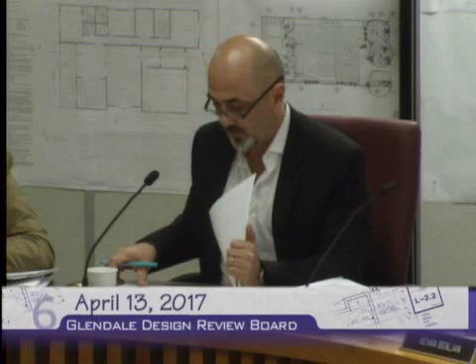So, thank you. Now going down the agenda, is the applicant for Deermont in? Yes. Okay, perfect. So we won't take the agenda out of order, we'll continue on. Well, the applicant is here, but not the architect. The architect's not here yet.

What do we do? We're going to have some design questions. I think we should wait until the architect gets here. It would be the applicant's call, so it's up to them. He's in the parking lot. Okay, then why don't we just start presenting the case? Let's go ahead and do that, and then we can see where we are. Present slowly. Too much. Are we ready then, or are you reading the description?

This is case number PDR 1702018, located at 1819 Deermont Road. The applicant is requesting to demolish an existing 3,233 square foot single-story house with an attached two-car garage, built in 1962, and to construct a new 4,802 square foot two-story house with a three-car subterranean garage on an 18,022 square foot hillside lot, zoned R1R, restricted residential zone, in the floor area ratio 2 district.

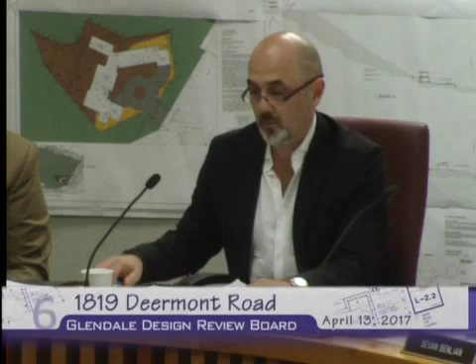So is the architect here? Okay, then what we're going to do is we're going to continue this, and we will temporarily put a hold on the project and move on to the next project. And then if the architect is here, we will come back to this, if that's okay with everyone else.

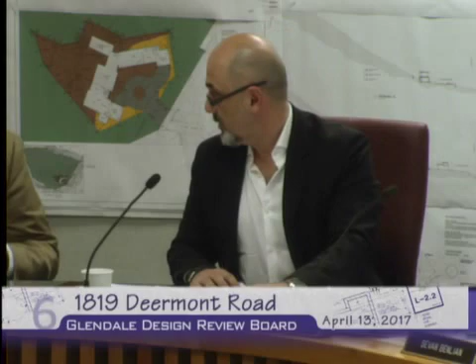We won't have staff repeat this again, but we haven't opened the public hearing, so we can go ahead and do that. So let's move on to the next project for now, Idlewood, and then we'll come back to this.

You gotta do something.

So this next project before you is located at 1443 Idlewood Road, case number PDR 1704989.

The project is the demolition of the existing one-story house, which was 1,754 square feet in size, and the new house will be 2,348 square feet. It will remain one story and will have an attached 504 square foot two-car garage, on a lot that is 7,858 square feet. The work includes demolition of the house and construction of a new home. In terms of materials, it will be an off-white color, similar color for the windows and doors, mission tile for the roof, stucco finish, and new landscaping with a pool.

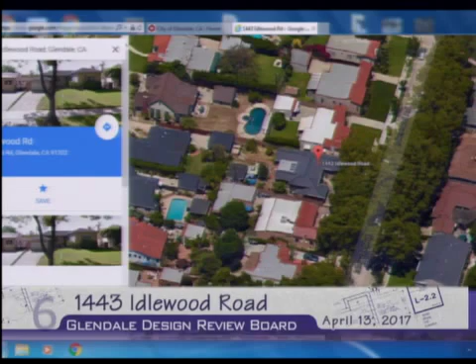We did receive several letters, which have been forwarded to you, from neighbors in the area. Based on my precursory review of the letters, the issues mainly relate to the design and mass and scale as perceived from the front. For example, the two-door style for the garage as opposed to a single door, and the front entry tower being incompatible with some of the other homes, or more of the low-scale entries in the neighborhood. So if you haven't done so already, I encourage you to please read those letters.

And the plans are on the panel behind you. So would you like me to go over any of the comments or staff bullet points in the staff report? If not, I would conclude at this point my presentation.

Just one clarification, Mr. Chairman. The home that was the 1938 home, there was no historic issues with that home, correct? No, we actually had Jay Platt review the home, and it was determined that it's not eligible for state, local, or national register or of any historic significance.

And one other point of clarification. One of the emails I read seemed to indicate that there was construction or demolition done before any permits were issued on this property. Well, that is correct, because the plans were in the plan check process without having received the final building permit approval, and during that time is when one would assume that took place. Okay, yes. Thank you for the clarification.

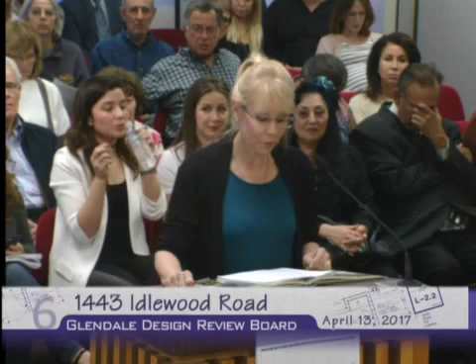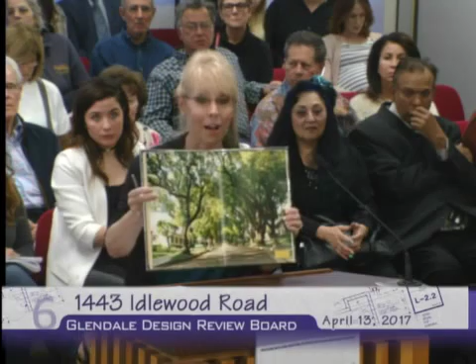We are very proud of the 1400 block of Idlewood Road, as our block was featured as the centerfold with our camphor tree-lined streets in the book Glendale, Jewel City of the Verdugos, published by the Glendale Chamber of Commerce in 1995. The centerfold is the 1400 block of Idlewood Road, published in 1995, as I said.

And I believe each of the design review board members received emails of the photos from this book, and were also emailed a black and white photo taken in the 1970s by a family member. Our family has several photos from 50-plus years ago that show that little has changed on the block, and those pictures look like they could have been taken today.

Sadly, because of the happenings at 1443 and the blatant disregard for the architectural integrity of the neighborhood, that isn't the case anymore on that section of the block, and it breaks our hearts.

Getting back to the proposed design, here are our three main concerns. Double garage doors: there are only three houses, which include 1443 Idlewood Road, that have garages located in the front of the house on our block, and none of them have double garage doors. Front door of the house: we feel the double front door does not fit the look and style of the neighborhood and looks out of place.

And finally, the roof - we feel the roof looks way too high compared to the other houses on the street and in the area.

Unfortunately, we must also point out, as you well know, that we're very distressed that the construction, the tearing down of the structure, apparently started to take place without any final approved building design in place. We, along with our neighbors, had to endure looking at a fenced-in construction area for the last 9 to 10 months in which no construction work was allowed to take place, and it has added to a messy and unkept look to our block.

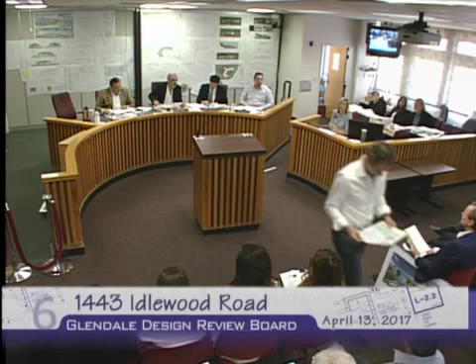Yeah, thank you. Mm-hmm, thank you. Is it Les Halpert? You can answer the question if you can state your name and address. Les Halpern, and I live at 1450 Idlewood Road, which is a couple doors to the north and diagonally across the street from the property in question. Good evening, Board. Glad to be here.

First of all, Mr. Conkin, I'll answer your question. There were multiple trees along the street. A number of them have been removed for disease and other issues. There are two in front of the subject property. The one to the north was removed due to disease about a week ago. The one to the south was trimmed and was stated to have been in good continuing condition as long as it's taken care of. That is the one that would need to be removed to accommodate the driveway in question.

So, like's been said before, I think we would strongly fight the need to remove that tree. We do value our trees. My other comments have pretty much been covered before. There's two additional things that I would like to say.

The homes on the street are all unique. There's a number of unique features to each one. Our house at 1450 and the house on the same side of the street just to the south of us were both done by the same architect. When we talk about door entryways, this particular architect was noted for designing entryways that did not go directly into an entry - everything's at an angle. If you look at our house at 1450, if you were there this morning, you'll see that the walkway comes up, the door is at an angle, and in fact, when you walk into the house, you're not walking directly into a hallway, an office area, or a living room. It just kind of goes into almost like a little foyer, and then it angles off.

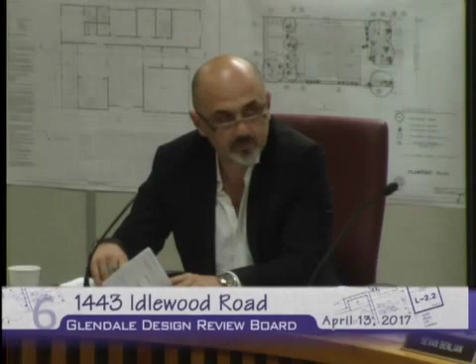Mr. Chair, also on that note, I'd like to clarify so the audience and the neighbors know as well. They did come in to the city in good faith to apply for a permit. They were in the plan check process, as I stated earlier. They did receive a DRB exemption for that scope of work. We've heard now what happened out in the field, when it was discovered by whomever, whether the building inspector or neighbors, and that was brought to our attention. The applicant did once again come back in good faith to the design review board, applied for submittal for a design review board, and paid the double fees, which is not cheap. I want to say it's close to $15,000 that this applicant has paid. So all, again, in good faith to move this project forward.

Okay, well, I'm glad that you cleared that up. Thank you. Do you have anything else to add? You need to speak if you do, and you have 2 minutes to speak. And if the owner can fill out the form.

Actually, we pulled a permit for interior remodeling, and after that accident we tried to keep the same design and everything. The previous planner should know, the city knows how long it takes. We did all the calculation for demolishing and everything, and tried to keep the project going, but it was accidentally done more than it's allowed. That's why it came such a long way.

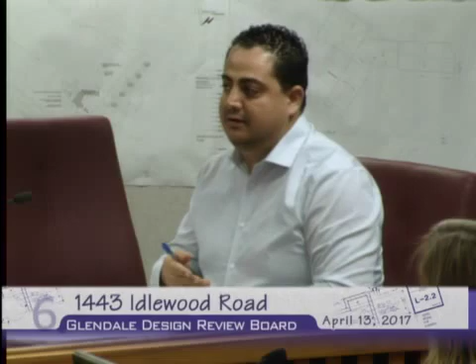When I was reviewing this project, it seemed to me there were a few things going right and a few things that weren't going right for the project. The things going right: you guys are following the footprint of the previous property. As mentioned by the president of the association, you didn't propose a two-story, which is a good thing, and you're proposing a moderate size, not a big house, so that's also good.

Now, the things that weren't going too good for me, I think they're all addressed by staff, and staff did a phenomenal job addressing these issues. As I heard from the people opposing the project, they have the same issues, other than the permit issues, which the owner has clarified, so that's not a problem.

Staff put conditions to fix most of these issues, which is the door in the front, the entry, the roof, to simplify the roof and try lowering the height. The only thing staff didn't touch on, I think, is the windows, and staff I think recommended just changing the color. I would say just change the material and upgrade the windows to something nicer than vinyl.

And the only thing I think staff didn't talk about is maybe the garage door, which I agree with the comments the residents brought up, maybe going to a one garage door. That's going to help a little bit with that look. Other than that, I think if you follow the conditions, I can support the project.

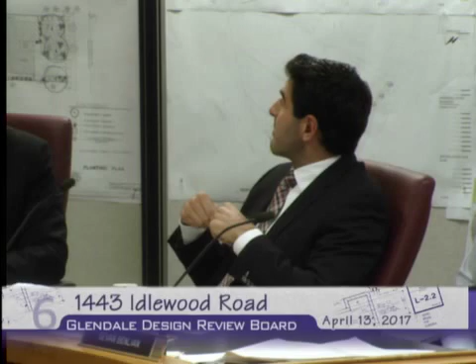I think reworking some of the materials and applying more detail to the rafter tails will allow us to keep what's presented here, but make it a lot more compatible.

So those would be my thoughts, and we could discuss it some more after you guys speak as well. Okay, thank you.

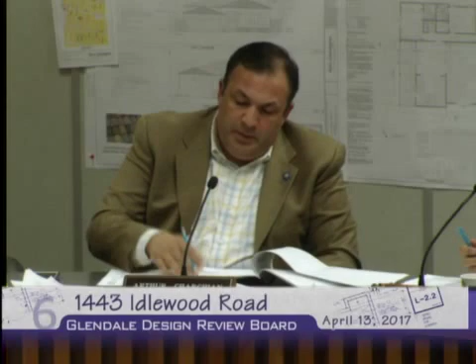Thank you, Mr. Chair. So I do agree with some of the staff comments, particularly the door. I think the door is too ornate and is in a style that is not conforming to the neighborhood. The iron doors just don't fit in this type of neighborhood.

I think that the overall mass of this home is okay, but I have issues with the height. I agree with one of the speakers that the S-type tile is not a very good fit, especially the Capistrano palette that they're suggesting. It seems to give it that track home kind of feel, and I don't think the homeowners are going for that, and I don't think the neighborhood deserves that kind of a look.

I thought the attempt by staff, I'm assuming this might have been a staff condition, to split the garage into two by having that center piece was trying to break up the mass, and I'm kind of confused because I heard a single garage door and agreement that a single garage door is the way to go. I am of the opinion that having that break in the middle kind of breaks it into two smaller garage doors and gives the appearance of an older kind of garage.

Also, from a functional perspective, because of the way the driveway is laid out, that second garage is really not going to be as accessible because you'd have to make a sharp right and then a left to enter because of the way that the cutout is. So primarily they're going to be using that one garage door if we leave it as two doors versus one. So that's kind of my thoughts on that piece.

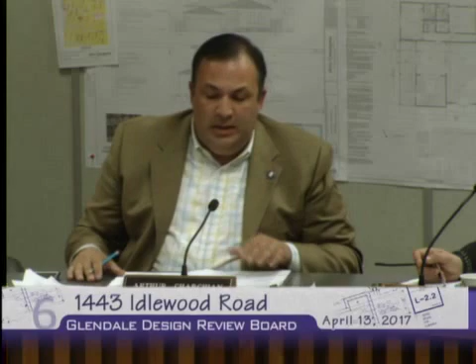Is it a Mediterranean house? Is it like a new Spanish-style house? I think if we are going to condition it, we should condition some characteristics along one design palette, and I see elements of both here. The bay windows, especially the one in front off the master bedroom, seems very out of place for the neighborhood, and so I would look for feedback on that as well.

Okay. I agree with the comments that the white vinyl, off-white vinyl, is just not appropriate and should not happen. Thank you.

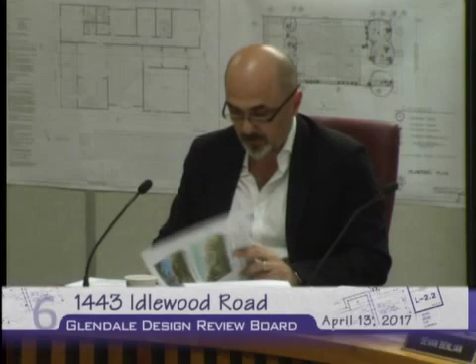So I agree. I think one of the big questions you just brought up is that we have to determine if this project, we need to look at the style that they have chosen, being that it is a Mediterranean style, and the majority of the homes that do have Spanish tile along that street are a Spanish revival. There are some ranch home styles. So the applicant has chosen to go in the direction of more of a Mediterranean style. I think one of the biggest issues I see is the amount of roof that we see from the street. The majority of the homes, almost all the homes that have exposed or hip roof seen at the street level, are all asphalt shingle.

So the Spanish tile roof that we have, majority of them, you see the rafter tails or they're gable. So I think by looking at this in the sense that right now the current home that was there has the hip roof, we need to—and they try to mimic that by replacing the lighter roof material with a heavier Spanish tile roof. So I think a study of a roof plan is definitely going to help.

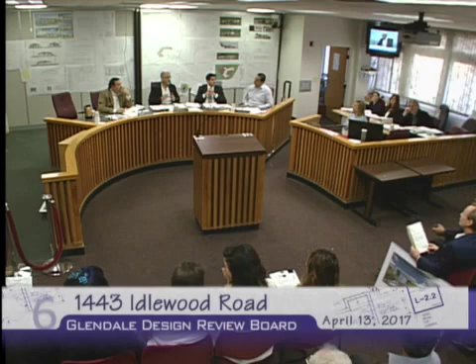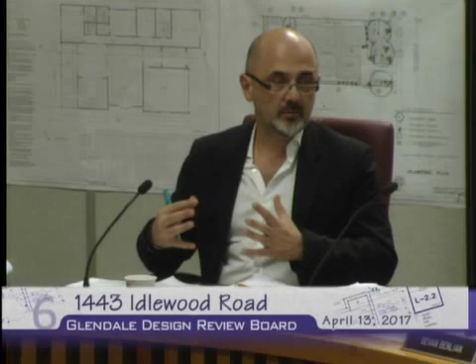One quick question. It seems like a fairly steep driveway when I was there, but I'm not sure, I didn't really see that steepness of the driveway, being that it's lowered. So I don't know, to be honest, if it's really an issue there or not. But with the gate and construction gate that were there, I wasn't able to see it, and there's no survey, so I don't know if it was high enough. But they have lowered the garage, so they do have the opportunity to make sure the slope of the driveway meets the minimum required slope.

So there's a lot of little things that need to be revised and be consistent within its own scale and style. By the end of the day, it's going to change. So the question is, do we see this back, or do we want to send it off?

Mr. Chair, on that note, the last item is whether we want to return it for redesign or we could actually condition many of the conditions we've been talking about. I think the latter is the way to go. Because there's no second story and we're not really talking about mass on a second story, it becomes a lot easier for us to prescribe a type of style that we think would be appropriate given what's being proposed, and all the other conditions we've talked about, and then have them work with staff. That would be my approach.

And I guess we could maybe see if everybody else is on the same page. If that's the case, we could spend our time and efforts on conditioning those conditions. And if not, then we'll just move on and spend our time on that motion.

I agree with this approach as well. The big question is, if we're going to completely redesign the project, I think we owe it to the neighbors and everybody else for them to see the end result rather than be surprised by what they come back with. So if it's going to drastically change that much from what's being proposed, versus somewhat of a small revision, creating a gable end roof at the garage or replacing some of the windows, that's what my concern is. So I guess I'm leaning more towards those kind of prescriptive conditions.

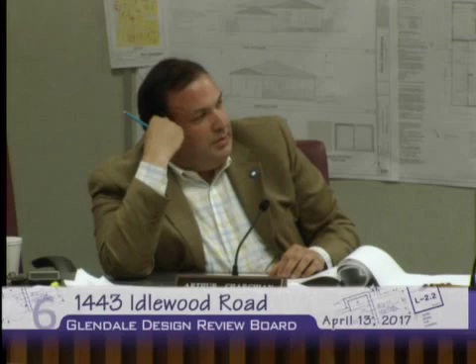Usually the flat garages that I've seen are separate, detached, in the back. They're not the dominant part of the front entry of the building. So I think... they are the garage. There are garage doors.

So short of us telling them to move the garage to the back, and we're not saying that, we're keeping the garage in the front. So I think we just need to make it part of the design of the building itself and make it work. Okay, fair enough. You know what I mean?

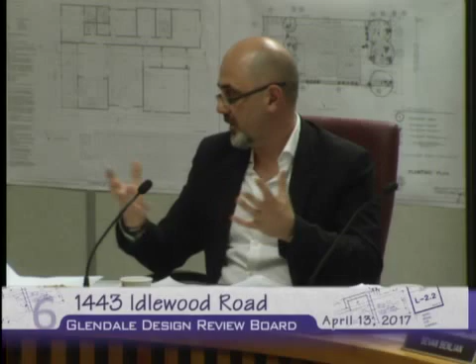So I think having the large gable roof that they're proposing gives a lot more mass than it needs to be. So I think a gable end or a hip roof with the exposed gable end would reduce the ridge. There's also the problem where that proposed hip roof at the garage hits the higher wall behind it.

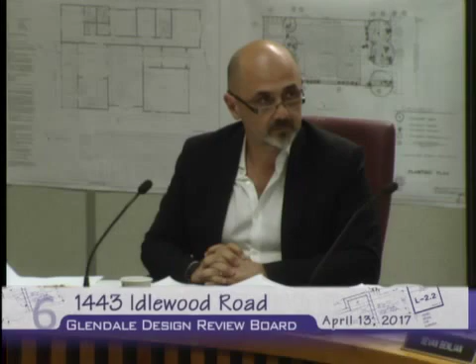It leaves kind of some awkward wall area. So we would hope through the roof redesign to make that interface a smoother transition.

So with all those conditions that were presented, is that something, Mr. Platt and staff, you're comfortable at least taking a shot and working with applicant? And if you're unable to get these resolved, it would come back to us anyways. Is that something you guys are comfortable doing?

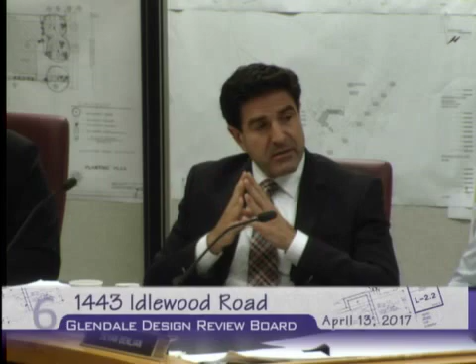If we could get a little more clarification from the board, personally the difference between Spanish and Mediterranean on some of these new houses is kind of a fine line. I'm not sure it matters that much as long as you're comfortable with the design, but if that is an issue for anyone, we should hear more about it.

I think really the biggest issue would be how the windows are treated, whether they're recessed or not, and the material around the windows. That's really where details and materials need to be consistent with the style being presented overall, so it all jives with the roof, the windows, and the entryways.

Whether it's a contemporary Mediterranean or a contemporary Spanish, it's a fine line anyway. We're not here to dictate style necessarily, but for the style, it's standard staff practice to have recessed windows with sills. On a Spanish style, we just have a simple stucco opening. If you wanted a bullnose, we could look for that specifically.

I've added a condition to make sure we get a vertical and horizontal section through a typical window opening so we can see its placement in the wall. I think that's up to the applicant, to choose a style and holistically treat the entire project with that style and make the materials match.

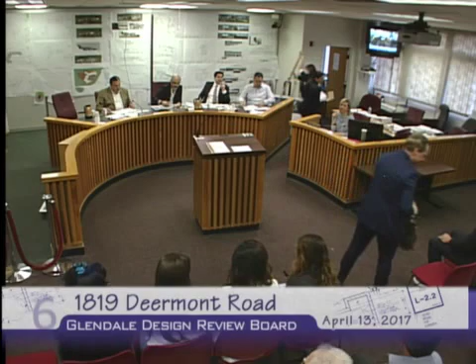Good evening, Design Review Board members and city staff. Horst Knoppenberger, I'm the architect working with George and Maria Najarian on Deermont. Apologize for being late this evening to you and to the neighbors who have been patiently waiting. Having said that, let me introduce the project.

George and Maria have a growing family of two young children. They recently purchased this house after George grew up in this neighborhood. The existing single-story house is roughly 2,600 square feet, built in 1961, and has really not been touched since. The pattern of development within the neighborhood has evolved into much larger homes. The existing site is 18,000 square feet, and we're proposing a house of 4,800 square feet of habitable floor area.

When I met with George and Maria, George, having grown up in the neighborhood, it was very important to him that the design of the house have a contextual approach. George drove me up and down the hills, and we looked at a wide array of architectural styles, modern houses, Mediterranean houses, all the things you were talking about this evening.

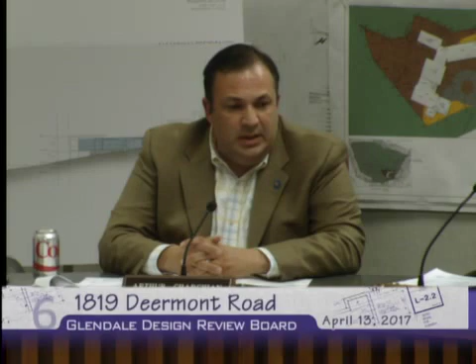So, you're coming in now with this project, and I will say, and this is a little earlier in the process to say this, but it's a good design. But we need to have these calculations in order to understand exactly the impact on the soil, on the hillside, on the amount of earth that's being moved, on the impact to the neighborhood from that earth movement. So I feel very uncomfortable moving forward with this huge gap in information.

I'm sorry to say that, but it's critical on a hillside development. If you had told me that you were building on grade or a couple of feet, we could figure that calculation out. But you're talking about 16-foot cuts. I was at the site today. I stood there and I looked and how is there no earth movement? Which is what the staff report said, and it turns out that that's an error.

Thank you for those comments. There are certainly things we should consider. One thing I would say is we went through a very lengthy process, working closely with planners here at the city. We had 3 meetings, and it was very helpful—they helped us make informed decisions about the project. I read the Hillside Design Guidelines, and several things are encouraged in them, like side-loaded garages. So it's a bit of a give and take. On one hand, what we're getting in terms of pedestrian experience is we're not getting a garage on the front elevation. Unfortunately, or maybe paradoxically, on this particular site, to do a side-loaded garage, there's going to be excavation.

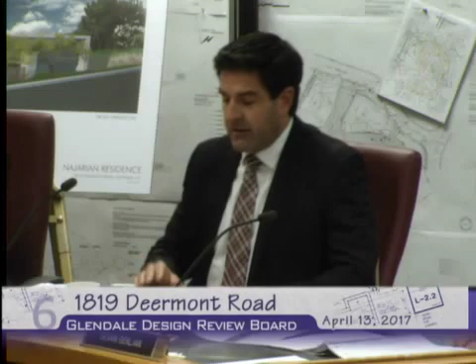I have a question. Just for clarity, there's an existing pad that exists, with a retaining wall at the end. And somewhere in that area, you're going down one level for your living level, and then down another level for your garage level. So from the edge of your excavation, what is that distance, more or less, to your retaining wall?

That's a good question, thank you for that. So the upper diagram, in yellow, is a section cut from the front of the site to the back of the site, showing existing grade. I'm sorry, would you mind coming up? Actually come up, that way. There should be a pointer.

This diagram was not submitted. Thank you, and if you could just speak loudly for the microphones. So this section is cut from Deermont to the back of the property, and you can see in yellow here, this is existing grade, natural grade. So you can see how much of the proposed structure is below grade and how much, roughly the equivalent of a single story, comes up above grade. The site is relatively flat as we cut this section, and then it does drop pretty quickly out here at the end of the property.

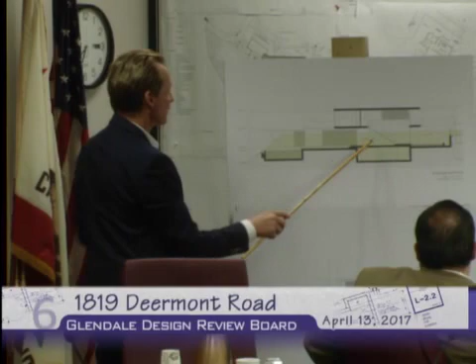Right now there's an existing swimming pool that's pretty close to the edge of the bluff. So you can see the proportion of excavation—the area where the house is actually going to be below existing grade. I hope that answered your question. Would you outline the existing house? Yes, where is the existing house?

I have that here as well. This diagram is cut right through Deermont, and in blue we're showing the profile of the existing house. It's only over here, where the roof of the master bedroom, that we have some clerestory windows—one of our sustainable features of the project, cross ventilation. This roof is 2 feet 6 inches above the ridge of the existing house, which was built in 1961.

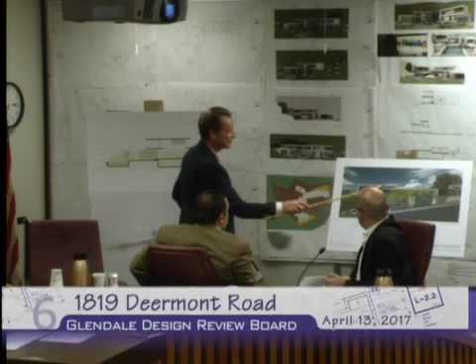And so that's this little section, and then the house built in 1961 stops right here. There's a driveway sloping up to the house. So the only portion of the existing structure's outline that falls outside the perimeter is really just this 2 feet 6 inches and a small little section over here.

I have two follow-up questions. By the way, I very much appreciate, I think we as a group appreciate all the diagrams. It is extremely helpful, so thank you for taking the time. My pleasure, to put those together.

In the top section, can you also describe more or less the edge of the existing structure if you were going to look at it from the top? Yeah, so can you describe where the pool is, more or less, at the edge of the bluff.

That's a great question, and that's something I didn't bring with me, but if you had to guess - as an estimation, right along the edge of the bluff there's the existing pool, and then about 12 or 14 feet of patio. So I would say the existing single-family structure - George may have seen it because you've seen the stakes, maybe George could speak to that - but I would say the stakes here are probably pretty close to the downward edge of the existing structure. Yes, okay, it is, and good guess.

And the second part of my question is that on the lower level, there seems to be about two equal spaces. You have a garage, and then another space that's actually probably a little bigger than the garage, labeled as mechanical room. Yes. And I bet that's adding a good amount, because it's about 500-600 square feet. It is, towards your grade. What is the purpose of that room?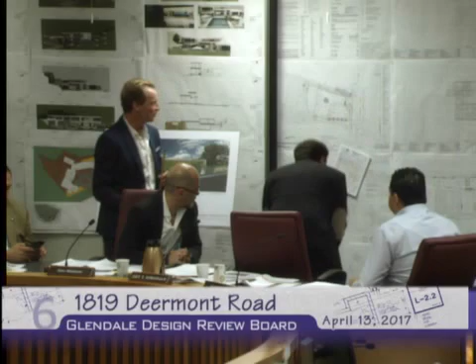That's an herb garden. George likes to cook, and I can show you in this elevation, right here - this is the kitchen, there's a covered outdoor space for eating, and then as you walk around that wall, there's an herb garden. We want this house to be sustainable.

As Mr. Charchian brought up, the extra caution that goes into looking at homes that are over 1,500 cubic yards of grading - if you had to guess, what is the cubic yardage of that area we just referred to?

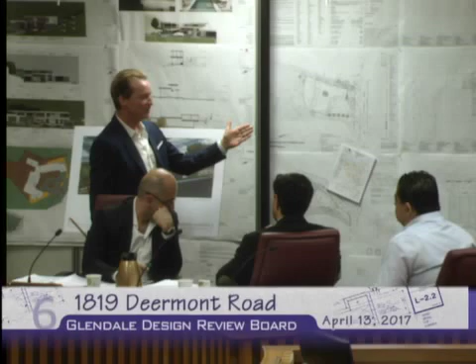So a 3-car garage, that's going to be about 600 square feet. The space above it is 600. That's 1,200 times 8, that's 9,600, divided by 27 is about 300 - does that sound about right? Maybe 350 cubic yards. So of the 2,700, about 300 cubic yards are in that space? Yes, you have about 1,500 square feet for the garage and the mechanical combined.

Okay. I do have, if you can go over there, I do have a question for you as well. What do you anticipate to be the structure of the roof and the flooring and the structure of the building?

Yeah, we've designed a lot of houses like this up and down the coastline, and we have projects in other places like Dallas and Denver. Especially on hillsides, it's going to be steel, caissons for the pool at least. We may have caissons for maybe the downhill portions of the house as well. When you have a lot of glass like this, you invariably have primarily steel construction, and then either wood framing or metal framing. We're looking at maybe doing metal framing.

The reason I'm asking is that the profile I see along the street and rest of the building is very thin. It's a 12-inch profile that goes around. But front and back, it's the same elevation, same thickness goes front to back. So there's absolutely no drainage or any kind of slope being thought of. I'm just wondering, how's that going to be taken care of?

It's a great question. We try to keep these structures, the vertical package of the roof, as thin as possible, because we're trying to create this feeling of weightlessness and lightness on the hill. So all those inches really matter quite a bit. But the roof package above the master and the lower roof at the upper level to the right of it actually is an 18-inch roof package on the outside.

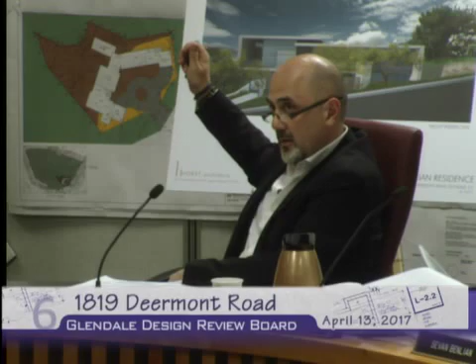So it's 12 inches for structural, and we anticipate 6 inches for a parapet so we can contain the water. And then on the inside— So your sections that you're showing 12 inches, they're actually 6 inches higher? Is that what you're saying? So the building height is 6 inches higher? I believe the entire package is 18 inches, and you're absolutely right.

I'm not seeing any curbs on that elevation. That may have just been a drawing mistake, but we prefer curbs over gravel stops. With a gravel stop, you sort of force the water to come more to the middle of the roof, and we're trying to avoid that. But we do anticipate an 18-inch structural package. Okay, thank you. Thank you.

Yes, well, I've stated my concern that I don't have enough information to move forward without an actual calculation. I hate to do it, but it needs to be in front of us for us to be able to consider this matter. It is significant grading. It's not included, and it's being made as a motion by a board member, and therefore I would say rescheduling on our own motion.

So to be fair to the applicant, the applicant doesn't have to pay any fees. The continuance doesn't—there are no fees for continuance. But we need more information. You may need more information. Well, it's fair to the applicant as well, because we would hate for this to be mired in issues down the road because we didn't have that information to consider.

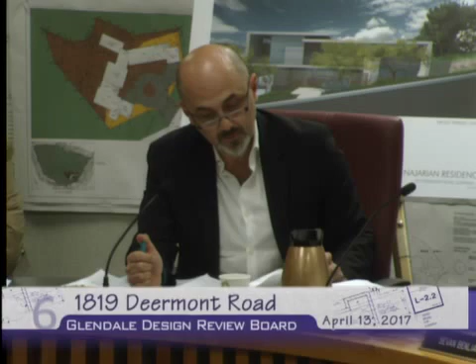I understand, and the question I have is for staff. Under the CEQA status and site slope and grading, it really indicates that there's no proposed grading, and CEQA is not required. And if, as the applicant stated, it's 2,700 cubic yards, is that going to trigger a CEQA?

Well, it triggers your environmental review. CEQA is part of our whole process, but it definitely is over the 1,500 cubic yard threshold, and staff apologizes for this error. It's clearly an error, and we agree that a continuation is probably in order based on the fact that we haven't really been able to analyze this ourselves.

Okay, so what do we want to do? Do you want to continue this until we have this information? Obviously we need to review and have the proper documents for us. Is it as simple as him getting the civil engineer to basically give the cut and fill and the overall grading, or are we looking for something more than that?

Well, I don't know what the consequence of the additional... Yeah, unfortunately I'm not as familiar with this project as I am with most, but just looking at it, I think we have issues. If we're really dropping down 8 to 16 feet here, I don't understand how that affects some of the other site conditions. The driveway—the architect is saying that the driveway meets our slopes, but it opens a question: just how's that happening? I think we could work with the design team to clarify some of these questions, give you additional diagrams and sections, whatever else we'd need. And if there's 20 feet of fill, as the applicant indicated, then you might have retaining wall issues. Right, visible from the street.

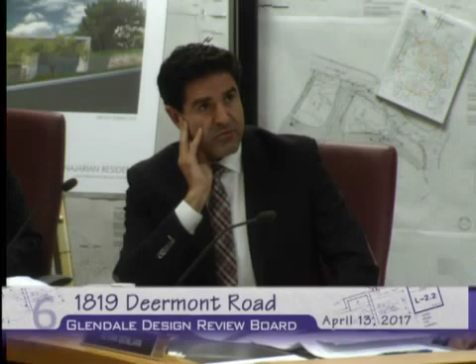Well, what if we do a date certain, and then as you go through your analysis, if it gets to be more complex or more things come up, then you would tell the applicant, and then you would renotice it.

But I think—and to add to Mr. Simonian's comment—I feel bad for the applicant as well. I'm not doing this because I'm trying to make it more difficult for the applicant, but it could be much more difficult for the applicant if we go through this whole process, approve it, and then somebody decides, wait, that information isn't there, I'm just going to appeal this, and then you're two years out from potentially doing anything with this property. So I want to make sure we have a complete package.

Anyone here from the public to speak on this, or just interested in it, whether you're for it or against it—there are postcards on the table at the front that you should fill out, definitely fill out, and then we'll be able to get your information in case we're renoticing it, and we'll try to also contact you depending on date certain or not.

Can we pick a date then, maybe in June? I think that would be sufficient time for a soils report. Well, wait, I don't know if we're asking for a soils report, but for calculations. They said they had a geotech report already, so it would be calculations, diagrams, and whatever else helps explain your site work.

Would you like to step up? We do have a question for you. Yeah, I mean, that calculation shouldn't take us more than a couple of days, so whatever the next hearing is. The next available, contingent upon George's schedule.

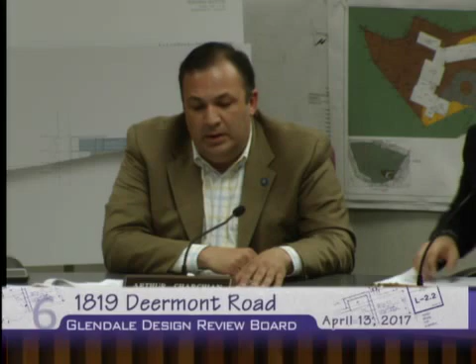Mr. Chairman, we also encourage people, I understand it's a Thursday, some people have religious obligations this evening, and we're going into Easter and Passover period. It's imperative that you also reach out to us by email. There's several emails from people that couldn't make it that have come in. There's ways to communicate with us. We just want you to have the information available, and we don't have it to move forward tonight.

Okay, so just to repeat, this matter is being continued to May 25th in order to have the applicant bring forth a soils analysis and the amount of grading on the project. Now, there was a motion by Board Member Charchian and a second by Board Member Simonian. So I would ask for a roll call.

Board Member Charchian? Yes. Board Member Simonian? Yes. Board Member Benlian? Yes. And Chairman Malikian? Yes. The motion passes 4-0. So for the next case, I will have to recuse myself and step away, but I would like to pass the baton to Mr. Charchian. Okay. And we will go on a recess for five minutes.

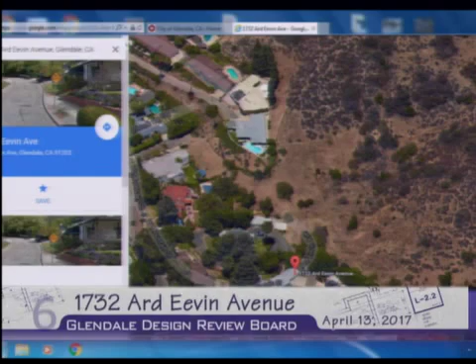Two single-family houses were proposed, and both went to the Design Review Board. One house was approximately 5,700 square feet with an attached garage, and the other approximately 6,000 square feet with an attached 3-car garage. One of the houses got approved by the Design Review Board in 2012, while the other was returned for redesign with conditions.

Since then, the applicant withdrew the subdivision application, and a proposal for a single house on the entire lot was submitted. That application for a single house on the entire lot is the subject of tonight's design review.

For the parcel map at the time, a mitigated negative declaration was adopted by the Planning Commission and acknowledged by the Design Review Board for each of the houses. The determination was based on environmental concerns: there were archaeological artifacts on the property, and the mitigation measures related to the treatment and disposition of those artifacts.

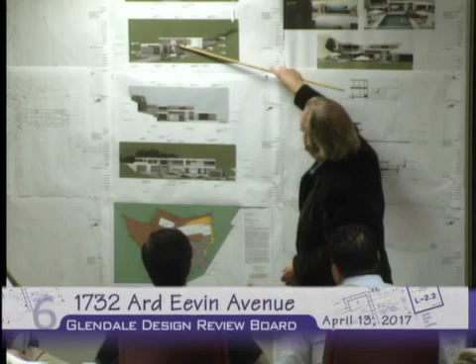This section here is really not occupiable space - it's just circulation space from the stairway to serve the bedrooms on the second floor. Right now this is more or less a stacked volume, and we thought this one-story volume could be maintained more explicitly if pushed back. Looking at the roof plan, there's a flat roof area over the living room, and the idea was that this bridge could be moved away from the front facade to create a stepping effect.

Can you explain the second floor he was talking about? This area is actually cut into the hillside - it's a little hard to see. The center section is more in the flat portion of the site, with an overhang here. Generally, with the hillside guidelines, we look to see that the second floor steps back to follow the slope. You're referring to that balcony, this thing here - I think this balcony overhangs, and this wall and that wall are more or less in plane.

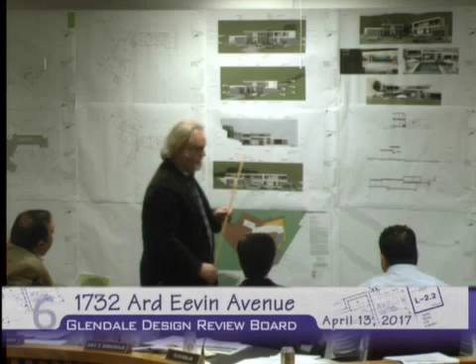If I may add a couple of things to this. We have photos of the site and the story poles, and we have them available here. We can make them available to the board members, and they show the relationship of the story poles in relation to the visible artifacts in the field.

The second thing I'd like to mention is that staff received a number of emails related to the project in opposition. They came from private citizens, individuals, and from the Historical Society, the Glendale Historical Society. We've made copies of all those emails and made them available to each board member and the applicant. Yes, it would be nice to see the story pole pictures as they relate to these artifacts.

Has staff had a chance to review these artifacts? What are they? Why are we calling them artifacts? They were identified in the environmental discussion at the time of the proposed subdivision a few years ago. They are historical artifacts. They haven't been vetted in terms of their significance, but the mitigation measures require that an archaeologist be available on site to document them and review their significance during any construction or demolition.

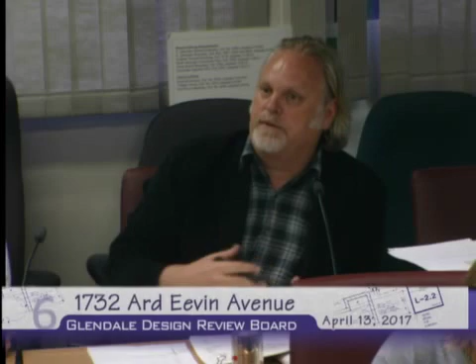The reason we're treating these as artifacts is because this site once belonged to the Dan Campbell family, who built Ard Eevin, associate of Leslie Brand, one of the early families in the development of Glendale. This site was sold off from an intact parcel that had been in the Campbell family until it was recently sold. The artifacts reflect some of the outbuildings associated with Ard Eevin, the house.

They include an incinerator that's above ground and is reasonably intact and in decent condition, if not great. There's a low stub of the foundation for what they called the milk house, which is very close to the garage that belongs to Ard Eevin. Then there are a couple of movable artifacts that we're not treating as archaeological resources. There's a trough that looks like it was used for watering horses, and some farm equipment which we don't treat as artifacts.

The only artifact that's going to be affected by the construction is some simple foundation walls, part of what they're calling a barn foundation kind of toward the center of the site, which is underneath the footprint of the house. That was underneath the footprint of the previous proposal, which called for a much different kind of turnaround—going to be a city cul-de-sac. Where the current turnaround is on private property, it just serves the house and the two garages.

Thank you. When the case came in front of us some time ago, I didn't really remember as much focus on the artifacts at that point in time, so that's why I asked. We think the same mitigation measures should apply because the area of construction and the projects are very similar. Any other questions for staff? Mr. Pelican, are you done with the staff report? Yeah, I'm sorry, thank you. I'm done.

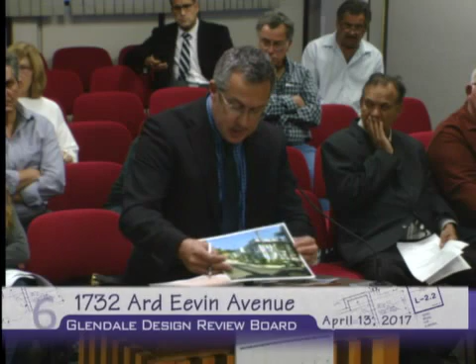We're proposing a house that in total is 7,562 square feet, for a floor area ratio of 0.02, or 2%. The average size home in the area has a floor area ratio of 24%, with a range of homes from 6% up to 49%, which includes this house located at 879 West Mountain, a few lots away from us. It's a 7,386 square foot house on a 15,000 square foot lot.

Mr. Bagdikian spoke about the history of the site. There were two houses proposed on this site, and a parcel map/subdivision was approved for these two houses. The two houses combined were approximately 12,000 square feet, about 6,000 square feet apiece. They also sat further up on the hillside, making them much more visible, with substantial grading and larger retaining walls required.

That brings us to our project here today: a completely new project, one single-family house now lower on the site, actually on the flattest part of the site. Far less grading, 8,000 cubic yards less than before, in fact less grading than the house you saw right before us. Going from 2 houses to 1 also eliminated a large paved cul-de-sac that was being required, so we no longer have that impacting the environment.

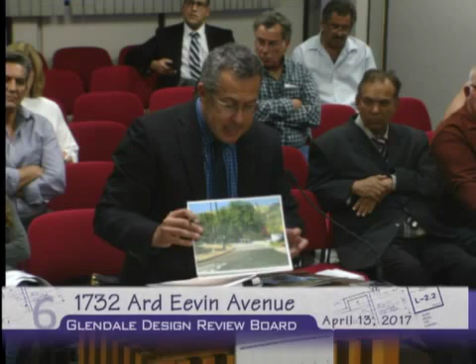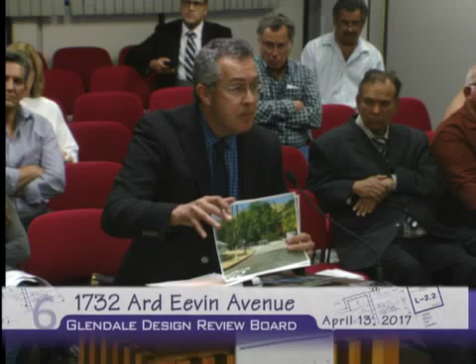The placement of the house on the site was very important to us, and not just to us, but to the neighbors too. I have some photographs we took standing on Mountain, looking up at the site. You'll see one small story pole sticking up, because of the placement of our property on the flat pad area and the large mature trees, which will remain. You can look at our landscape plan; we will be planting more. Privacy for the neighbors exists, and privacy for ourselves will exist.

The architectural style is modern and contemporary. It has high-quality materials and finishes. We wanted to stay true to the volumes and the style in general.

While we've worked closely with staff and they are recommending approval, we respectfully disagree with the 2 conditions being proposed. We feel that our contemporary house, because it sits on a flat portion of the site, would actually jeopardize the integrity of the volumes and the overall massing of the building if we were to push back the 2nd floor away from the 1st floor.

The 2nd condition concerns the placement of the building I just spoke about, but also the placement of the pool and associated pool decks, which is actually the most logical location given the topography, the drainage patterns, and the contours of the land. We've sat extensively with Mr. Bogosian, our civil engineer, to discuss these drainage patterns and where to place these structures. He's available to speak to that as well. Where we've placed it is exactly the best location on the site for those structures.

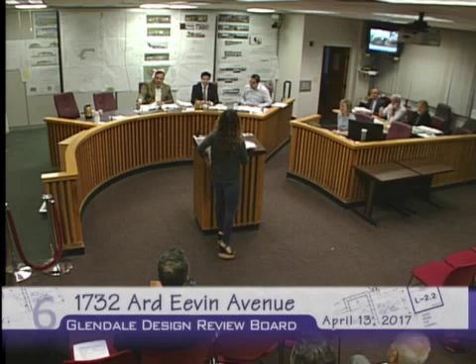Then our first speaker is George... it looks like Bogosian, but it looks like an R. Is it Bogosian? Bogosian. Mr. Bogosian, please come on up. And you're the engineer for the project, so I misspoke. We won't reserve the full 5 minutes; whatever Mr. Bogosian doesn't use, we'll reserve.

Mr. Chairman and board members and city staff, my name is George Bogosian. I'm the civil engineer of this project, and I'm here to answer any questions you may have regarding the location of the building, why it was selected at the location where we have chosen.

At the same time, likewise, the swimming pool. Due consideration was given strongly to the pattern of the drainage system and being the most level area we can find, and to be very sensitive about the amount of grading to be done and the retaining walls proposed here. Comparing to a prior project, we have 2 to 4 feet retaining walls in lieu of 10 to 12, 15-foot walls we had before. This is really comparing to that project, which was very extensive.

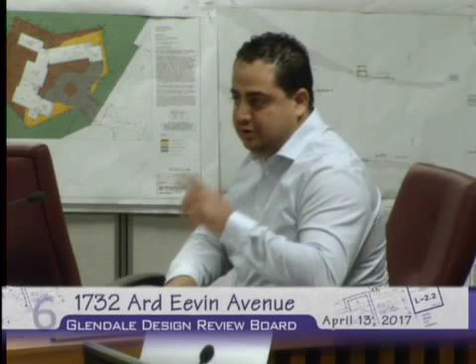I have a quick question, if I may—in terms of location of site planning, is this the most flat portion of the site? Yes, that's why it is. It's the most level area that you can find. As I said again, it is a big concern how much you cut, how much you have to export or import. Grading is most important with the drainage we have to consider, and the walls. But was it selected here closer to the neighbors' homes just because of easier access, or just because it was the flattest portion? The flattest portion. Okay, thank you.

Any other questions? Okay, thank you, Mr. Bogosian. Thank you. Next speaker is—and I apologize if I mess up people's names—Ina Neal?

Mr. Chairman, board members, staff, my name is Bila Neal. I reside at 877 West Mountain Street, which is the lot basically right on the corner of West Mountain and Matilija on the northern side.

I want to compliment the architect for his design. His design is quite lovely. As a matter of fact, it reminds me of Fallingwater. But I think that's the main problem, because it should not really be within 300 feet of a 110-year-old structure that is clapboard with gables, dormers, and was built in 1903. It's totally irrational for that particular style of structure to be that close to a structure that was designed in the last century. This is a 21st century design, and I compliment it.

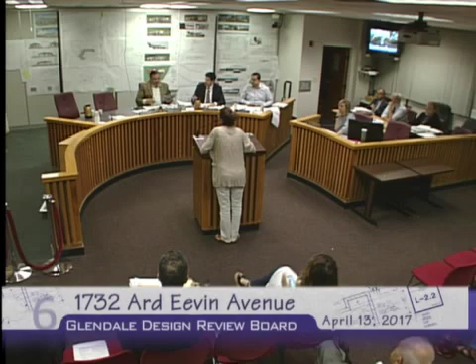Ms. Rao is handing me a picture of 851 West Mountain Street, which is the Ard Eevin home. Yes, I just handed you a picture of Ard Eevin. That's my home. Good evening, everyone.

My name is Judy Rao. My family and I live in the historic Ard Eevin home, 851 West Mountain Street, and we have responsibility for maintaining the historical significance of the site.

Our concern with this project is that the MND is no longer relevant because environmental issues under CEQA may have changed. The original project approved in 2010 was to subdivide the parcel into 2 lots and construct 2 smaller dwellings. These 2 lots were placed further back on the lot, not as close to our property line, and had less visual impact. That project was withdrawn.

The new project is for the construction of a 2-story, 7,562 square foot home with 2 attached 2-car garages. This project may include potentially significant impacts that were not reviewed in the original MND or the addendum, in the following 5 areas: scale and proportion.

The proposed dwelling is more than 2.5 times larger than the surrounding structures and completely out of scale for the neighborhood. Site slope and grading.

The project will result in significant alteration of the landform due to the limited, flat, buildable land on the parcel. If the size were scaled back, the amount of grading could be reduced.

Biological resources: a report prepared by Recon Environmental confirmed the existence of check dams in the canyon bottom and a sensitive wildlife species on site. A federally listed threatened species is known to occur in the area and may occur on the site. The National Park Service has documentation indicating this site is within the movement corridor for P41, the first mountain lion tracked in the Verdugo Mountains.

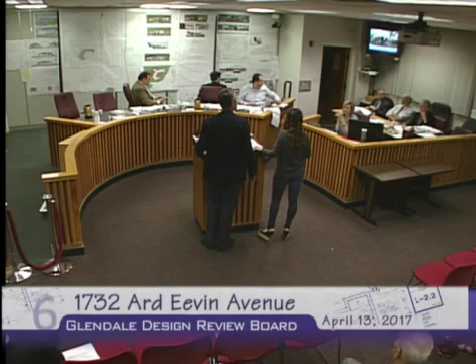Just an approximation, what would you guess? I did a quick scaling from the leading point of Ard Eevin to the 2-story portion of the house, thinking that was the comparable massing location. At the closest distance, it was about 150 feet. But the garage and lower portion is definitely coming closer to Ard Eevin. So about 150 feet then?

To the 2-story portion. And to be fair to everyone, it is closer to the non-historic house across Ard Eevin, where I think one of the speakers is a resident, and it was about 60 feet, again to the 2-story portion, but most of that section is 2 stories. I asked that question because it was conveyed like it's in the backyard, and it's visible, definitely.

I think that's fine. Definitely more than 50 feet, because the building to the property line is at 34 feet. Give and take the street and then the building, so it's definitely more than 50 feet.

Thank you. I'm going to ask Mr. Bogosian to come up because I have a question about his flow chart, and also about this blue stream issue. For the record, George Bogosian, the civil engineer of the project.

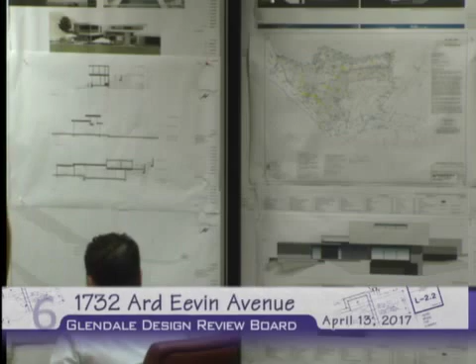Mr. Bogosian, you've given us a hand-altered printout of what looks like the preliminary grading plan, with some arrows drawn in. Do these arrows represent water flow? That's correct. My question is, do you have this retaining wall angled in the back to accommodate some sort of natural drainage course? Exactly, to accommodate the natural drainage course.

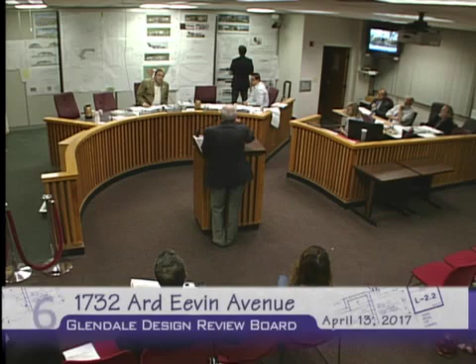And the second question I have for you: on the parcel map that we had approved previously for two single families, we had the two homes up above. That's why, for the natural drainage course not to interfere, we created a bridge for that. As I said, this site is so sensitive in every way. It has utilized the level property right in the front, so we no longer have the problems of a high retaining wall and fill and cut quantities.

Last question: in your research on this lot, have you seen any information on the blue line stream? No, sir. Okay, thank you. I'm going to go ahead and close the public hearing.

Does staff have a couple of questions before we deliberate? Do we have any information on any federal blue line streams? They're available on mapping, but I haven't seen any on our maps or referenced in the former environmental documentation. Okay, that should have been part of the discussion. We'll leave that issue for now and visit it in our deliberations.

I have another question for staff. Does the historic district overlap into this vacant parcel or not? It abuts the parcel, but the vacant parcel is not part of the historic district. No, and that's the way the historic district rules.

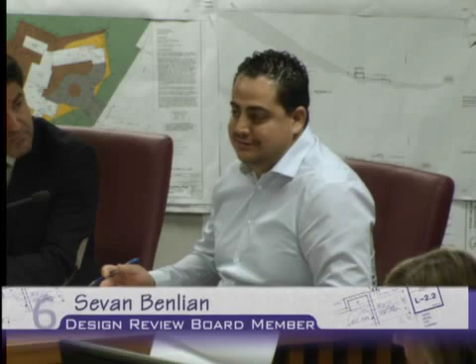So when I first got the package from staff, I normally like to look at the plans and review them, then read the staff report. This way the staff report doesn't influence what I think about the project. So I went through the plans—beautiful design, very nice, massive scale is nice, proportion, layout, everything works well. Then I go to the staff report, and I was surprised when I saw the 7,000 square feet, because it didn't look like a 7,000 square foot house, which is a good thing.

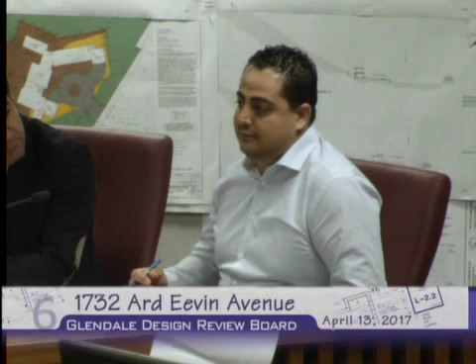I want to emphasize this point because here at this board, every time we give somebody a comment about mass and scale, we tell them it's not the square footage. It's mostly how you break up the mass, how you treat it, how you situate the building, where you put it in relationship to the neighbors, and if it's a hillside property, how you treat the mass and follow the topography of the site.

That's what matters, it's not the 7,000 square feet or 6,000 square feet. We've denied many houses that are 2,500 square feet just because they look massive and they're not designed right. In this case, I'll be honest, this does not look like a 7,000 square foot house, and it doesn't bother me because the site is huge. I'd rather have one house affect the neighborhood a little bit rather than the owner coming back and subdividing this parcel into 8 parcels, with 10 times the grading and 10 modern homes affecting this historic neighborhood.

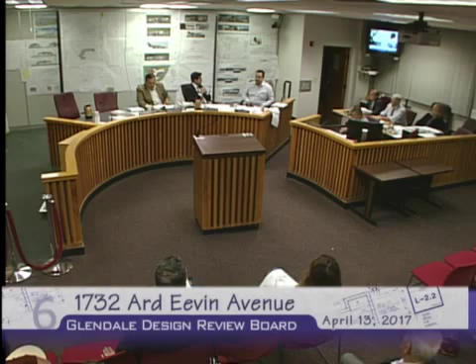That's not this parcel, the adjacent historic neighborhood. So in my opinion, if you oppose this, they subdivide it, you increase the grading, and you have more properties close to your property. This is a good deal for the neighbors because you're just going to deal with one property rather than dealing with multiple properties. That's just my humble opinion.

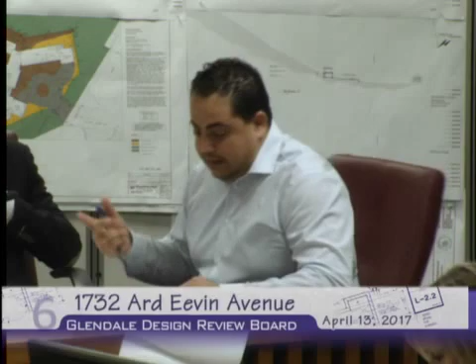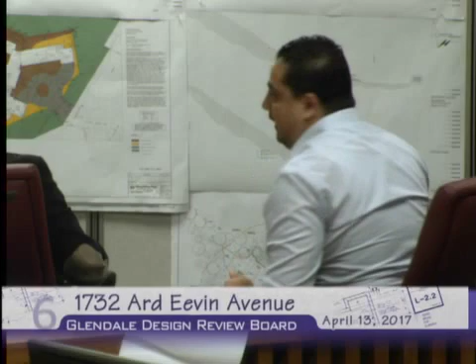So now let's talk about the design. In terms of design, I think the materials are well selected. It's high-end materials, the design is contemporary. The details and the materials are consistent throughout the design. I appreciate the civil engineer being here and answering all these questions on how this is going to affect the drainage, because that's an important part we look at as well.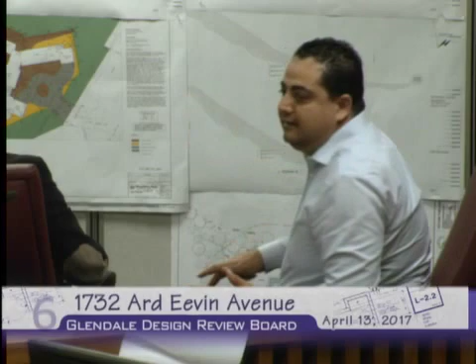Now, parts of... I kind of disagree with the staff report about the second floor. It doesn't bother me as well, but I think the footprint of the decks and the area is a little too much, and it could be reduced a bit to reduce that grading and get it to maybe 1,500 cubic yards.

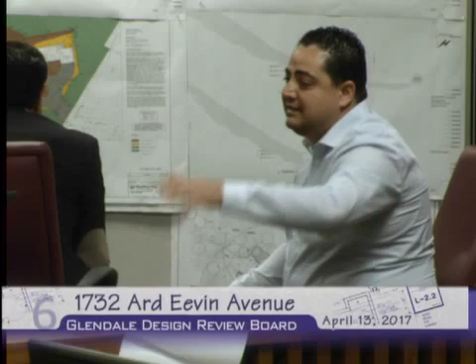In terms of situating the house, I looked at the story poles, and I think the location they selected is probably the best location, due to visibility. It's at the lower end. I understand some neighbors want the house pushed away from them, and that's a legit concern, but once you do that, you have a more visible house because it's sitting up higher, and you'll be doing more grading and dealing with other issues.

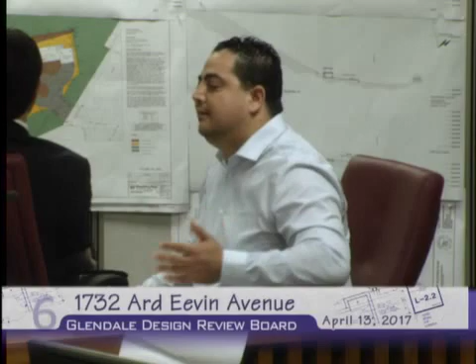A couple of neighbors mentioned that it's in the backyard, and we verified that it's not really in the backyard. If you're talking about 150 feet from one portion or 100 feet, that's not considered in the backyard. These are my comments, and I'd like to hear what my colleagues have to say, then we can discuss it further.

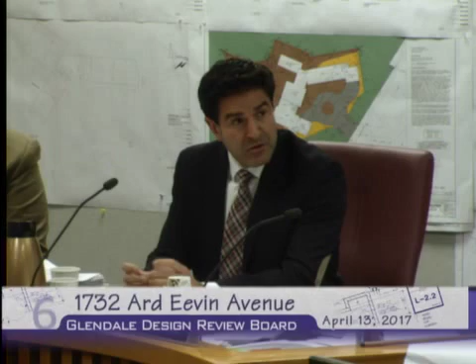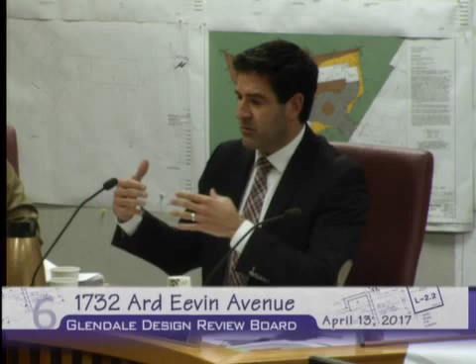This project, I remember vividly years ago when it came in front of us as a proposed subdivision, and the parcel map was approved at the time, and 2 homes were being presented. One was more or less in the general location of this house, and then another one was on the right side backing up to all the homes—I don't know, it's hard to tell, it's just at the corner here.

The second home was in this area, and so all these existing homes had backyards that were looking up. You can kind of see what I'm trying to depict in the site plan. The second home was more or less in this area from what I recall—it was some years ago, but more or less I remember. At the time, this board, which consisted of different members, but I believe I was on the board...

There weren't any major design issues with the house placed more or less in the current proposed location, but the major design issues were on the second home because it was literally in the backyard of those 5 or 6 homes. So you had multiple garden walls, and this larger home was really affecting the privacy of those existing homes. At the time, the one house was approved, the left house, and then the right house—if memory serves me right, I'm looking to staff.

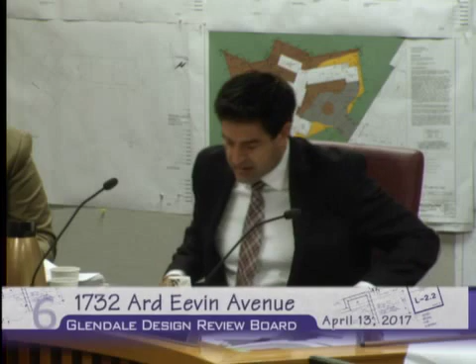Yes, the left house was approved—the left house was up the hill, pushed into the hill. The right house wasn't quite in that location—it may have been more in the location of the two-story wing to the right, more like here, kind of in the hillside also. The design review board had a lot of issues on the home placed on the right side, and we returned it for redesign, and nothing happened.

And so then the project went away, and now we have one home. The reason why I'm bringing this up is because there was a lot of history to this, so 10 years worth of cases and hearings and whatnot.

There are some advantages for us board members that have sat through these hearings, because you start to remember the issues and what was said, and how new applicants dealt with difficult scenarios, and whether a new scenario has improved or has actually gone the other way. So those are all important things for us to consider.

At the time, it was legally approved as a parcel map, so it was split into two lots, subject to recordation of a final map, which had some conditions with the cul-de-sac and whatnot. But in essence, the two lots were proposed.

And now we have one home, and so my mindset is that we have one home, and instead of this one home being pushed up into the hillside, it's actually moved down into the flat portion. And this one home is a lot smaller than the combined square footages of the two homes.

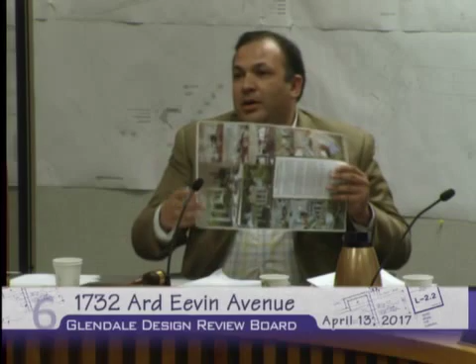And we have a little brochure that was provided by one of the speakers. It's a fantastic home. And my fear really was that what I had seen on the plans is going to be stuck right over it, hanging over it, visible from it. But really, when I walked up the driveway, because there was no way to actually drive, I walked it up there. But where's the house?

And I literally looked for the story poles. And to my right, I saw a couple of story poles. And I said, is that it? Can't be it. That's like a 1,200 square foot home, right? Or 1,200 square foot imprint. But that was what I saw. But you basically have to walk up, go to the right, and then you see the rest of the house.

When you look at the home from Ard Eevin, when you look at the proposed project from Ard Eevin, or you look at it from Mountain, you really don't see very much.

Now, there is a homeowner here that is very impacted. The gentleman who is a CPA, and I forget your name, I apologize, Mr. Robert Heimers. Mr. Heimers is probably the most affected because he is the closest. His garage, luckily, abuts that backside, so there's a little bit of a buffer from where his living space would be from the home. So, 50 feet plus a garage. We've approved things that have been much closer, and most setbacks in Glendale are unfortunately 6 feet for various lot sizes. So having that kind of a setback is nice.

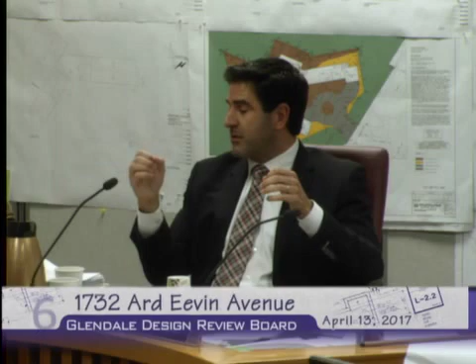Insofar as the comment you made, Mr. Charchin, about reducing the grading cubic yards, you said 10 to 15%. If we're saying 10 or 15% off the proposed cut number as depicted on the color diagram, that's one thing, but then as Mr. Platt is getting into, well, where does that occur? I really don't care where it occurs, I just want a little bit less cut. What are you trying to solve, though? If the idea is just to say we're cutting it to appease somebody, that's one thing. But if I have an objective in mind, I could better answer the question Mr. Platt is trying to put forward, which is, what do you do?

It's just reduced grading. In general, we try to keep projects as close to 1,500 cubic yards as possible. If there's an opportunity to do that here, I think we should make that something staff can look at. We don't need to pin it to a 15% number—that was just my way of stating that I think there should be a reduction in grading, a slight or small reduction.

So to answer your question, Mr. Platt, it doesn't seem like there's a consensus as to where that reduction should occur. Well, it's at the rear rather than at the two-story wing, on the hillside. Right. Okay, we can work with that.

Okay, now going to staff conditions: to step the second story of the two-story east wing and the second-level bridge back from the first story, consistent with topography—is that something you have consensus on? It doesn't bother me. I don't know about Mr. Simonian. I'm in the same boat, it doesn't bother me either. There's no support for staff condition number 1.

Modify the pool and associated decks to follow the topography. I think that really dovetails into the grading question, the general condition. All right, we'll eliminate the condition about the second level, and we'll revise that condition to read closer to reducing the grading.

And I have a clarification—so that bridge that was proposed before, that's not being proposed? That's completely out. Well, I used the word bridge—there was a bridge before spanning the ravine bottom where I assume drainage would come down. When I mentioned the bridge, it was the second floor walkway, which basically functions like a bridge. But what somebody from the audience mentioned was the previous subdivision parcel map, where in order to access one side to another, I thought the civil engineer was referring to creating some sort of bridge. That's the previous proposal, and that's not before us. That's gone completely. Right, that proposal is gone.

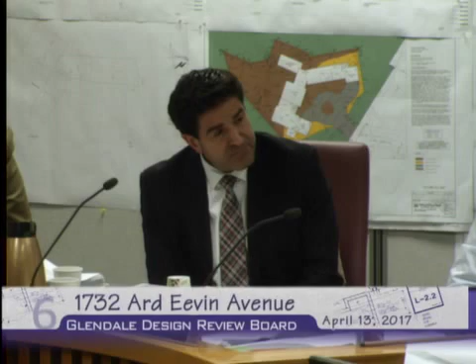Chairman Simonian, members of the board - essentially, the mitigation measure states that anytime you're doing any ground disturbance activity, you have an on-site monitor on the site at all times. And if there is something discovered, then they've got to stop work and investigate to see what that potential resource is.

Okay, that's already part of the requirement. Correct. The reason I wanted to highlight it is so that we can consider my suggestion, which is that a report be provided to the Brand Library. I think that'd be very appropriate, but that would be a consideration.

Based on the findings of the on-site monitor? Even if there's nothing found? Yeah, even if there's nothing. It's not a condition, it's a recommendation, a consideration - they could do with that whatever they want. But because it was a suggestion from the community, I thought that was a good one. It's really a non-issue as far as building. Anything else?

If I may clarify, the first mitigation measure requires that any written reports be provided to the city's planning department, the city's historic preservation commission, and the City of Glendale Public Library special collections. It's already covered in the mitigation measures. So it wouldn't hurt to add a condition as a reference or reminder of the mitigation measures. That's a good idea, but this was discussed already.